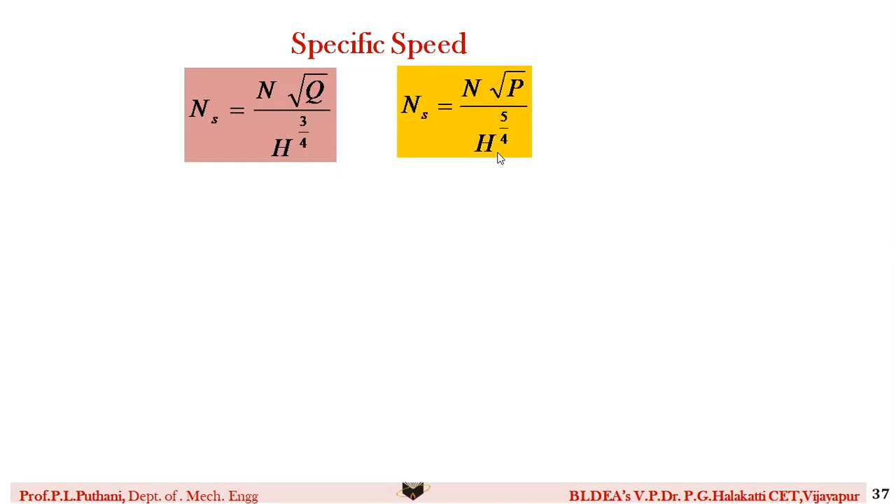Similarly, for unit quantities, if it is unit flow, we write it as Qu is equal to Q divided by root of H. Whereas another term known as unit speed, Nu is equal to N divided by square root of H. Similarly, unit power is given as Pu is equal to P divided by H to the power of 3 by 2. So many times in the examination, we have some confusion.

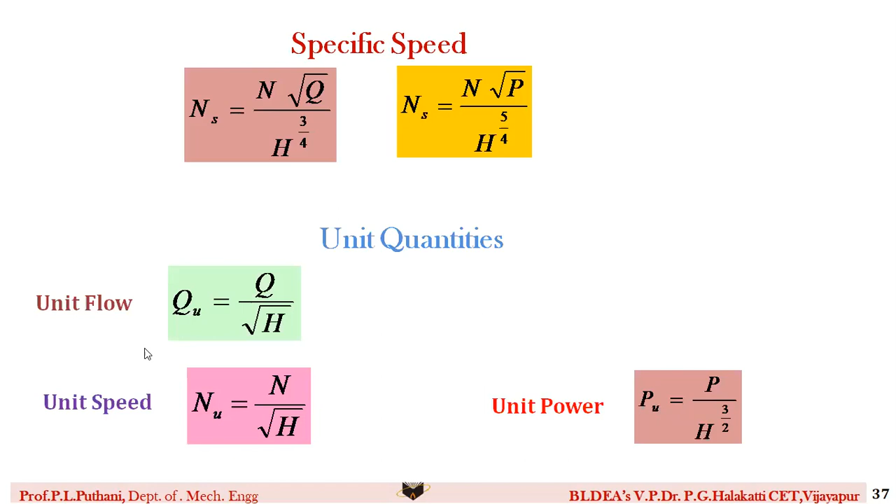Please do remember these simple equations very easily, avoid confusions. Only thing is, when we are writing specific speed of a pump, the parameter here is Q and the H value power is 3 by 4.

When you are writing with respect to turbine, we are having parameter as power P and the power of H as H raised to 5 by 4. The same here also, for both unit flow and unit speed, we are having square root of H itself. But if you come for unit power, the value is H to the power of 3 by 2. Please do remember these differences, such that you won't commit any mistakes when solving the problems.

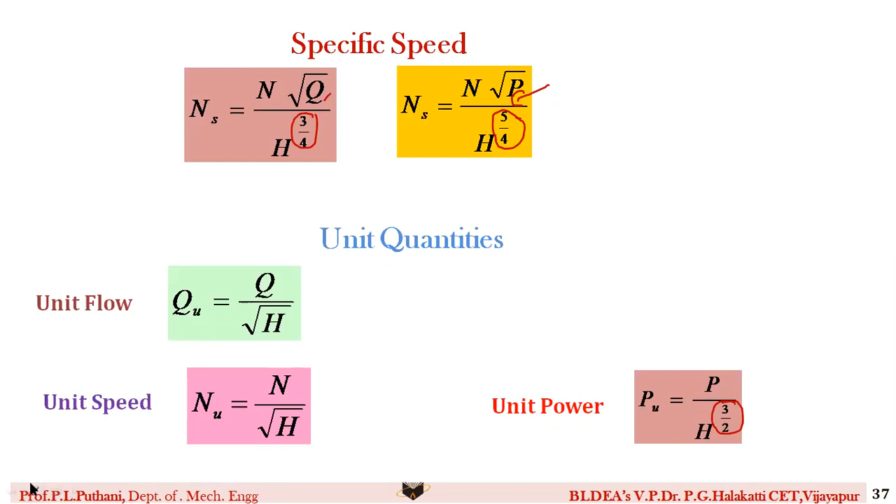Let us move further regarding the discussion of the questions asked in the previous question papers. The first question: there are 4 turbines of specific speed 890 metric, each installed in a hydel station. Each turbine runs at 50 RPM, sharing equally a total discharge of 260 meter cubes per second, available under a head of 1.73 meters. Assume each turbine has an efficiency of 82.5%. Find the power of each turbine in kilowatt. This is the question given to you.

So if you extract the given values from this problem: the first thing is how many turbines - we have 4 number of turbines, so N is equal to 4. Next, specific speed 890 metric - Ns is equal to 890, and it is in terms of metric.

So metric means MKS system. You need to convert this back to the SI system. So we have one conversion factor - if you use that conversion factor, you can convert from metric to SI of the specific speed.

Next he has said that these turbines, each turbine is running at a speed of how much? 50 rpm, which means that is n, capital N speed. All together they share a total discharge of how much? 260 meter cubes per second.

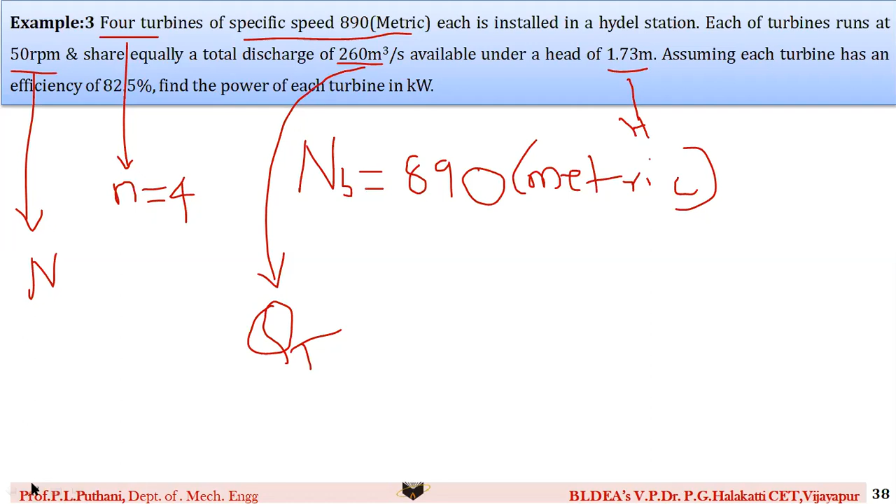Assuming each turbine has an overall efficiency of how much? 82.5%. You need to find what? Power of each turbine. These are the things you need to find out when you are solving the problem.

So now let us go step by step. The given data: as I said, the number of turbines is 4. Head available is 1.73. Specific speed in metric is 890 metric. Efficiency 82.5%. Then your speed is 50 rpm and the discharge is 260 meter cube per second. So you can note this as this particular thing.

I told you the important thing is if it is given in metric, you need to convert it into SI system. So for conversion to SI system, this conversion factor is needed for specific speed. That is, if you multiply the specific speed of metric with the conversion factor 0.857, then you get the value of specific speed in SI units.

So in SI units, let us see what value we get. We get it as 762.73, and this is a dimensionless case. Specific speed is a dimensionless number. It is just a number. Then for turbines, you know the specific speed equation.

If you are using, we write it as ns is equal to n root P divided by H to the power of 5 by 4. Speed is already given in the question, that is 50 rpm. Specific speed we have just now calculated. Even head is given. So what we can find out?

We can find the power P. So the power P, if we substitute all these terms, we get it as how much? 916.030 kilowatts.

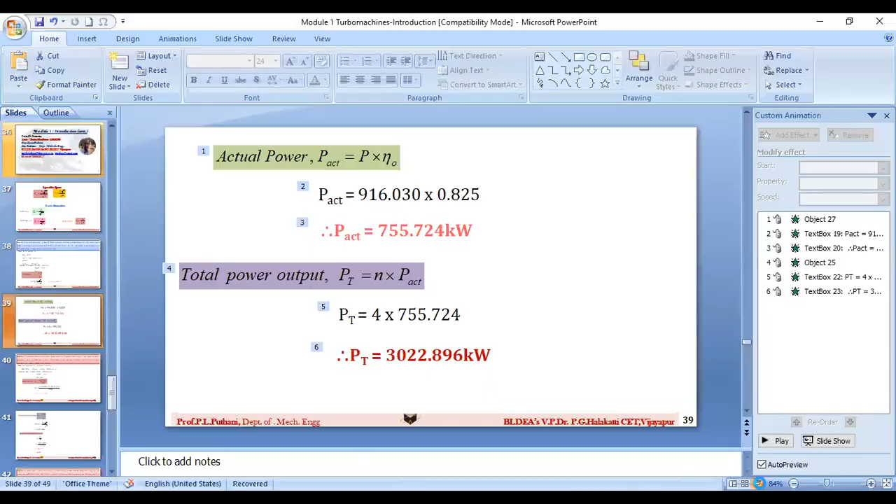So now actual power, yes, I was telling you, it is P actual is equal to P into efficiency not, or what you can do is you can have this. As I was telling you, the efficiency, you can term it as efficiency not, as I have taken it as the overall efficiency, no problem. You can keep it or you can leave it also.

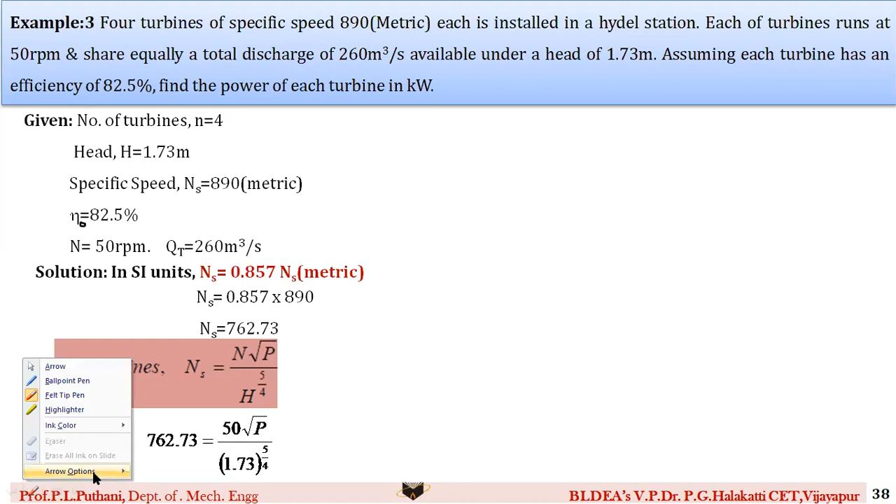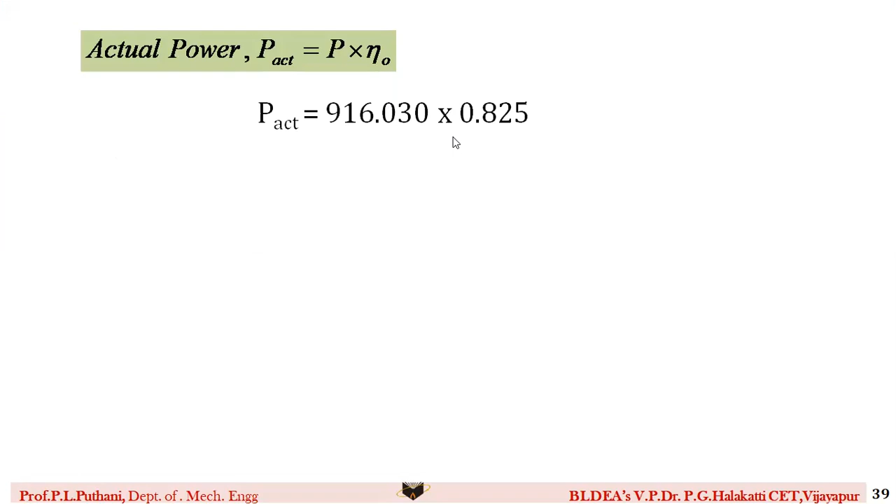So what do we get? Actual power is equal to the power what we have got. It is having some, the turbines are 82.5% only efficient. So we need to consider that efficiency factor also. So once you consider the efficiency factor, we get it as this value: 755.724 kilowatt. This is for one turbine.

This is for one turbine. If you are having 4 turbines, multiplying it by 4. So the resulting, how much we get? The total power output, we get it as 3022.896 kilowatt. This is the answer for this particular problem.

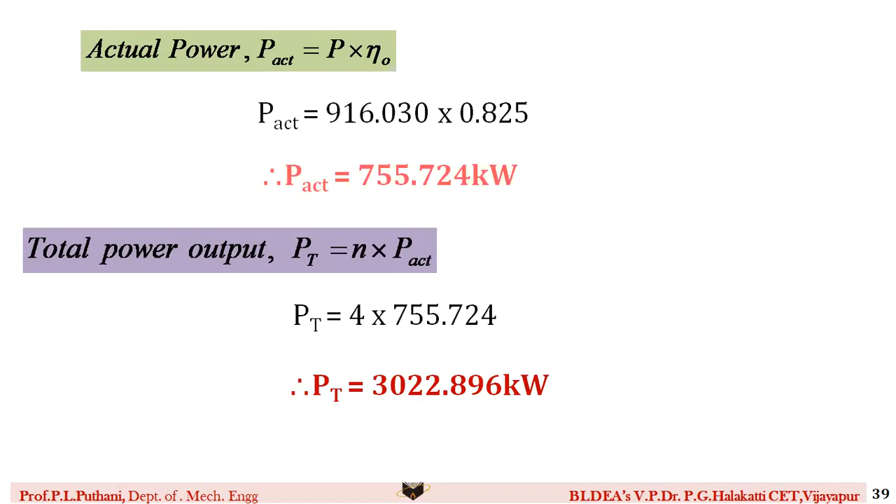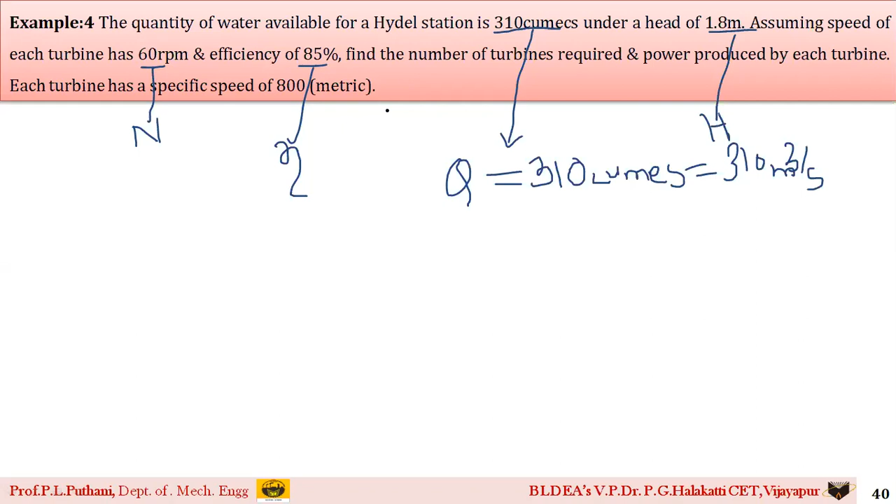We need to find out how many number of turbines are required to operate this hydel power station, along with the total power as well as the power required by each turbine.

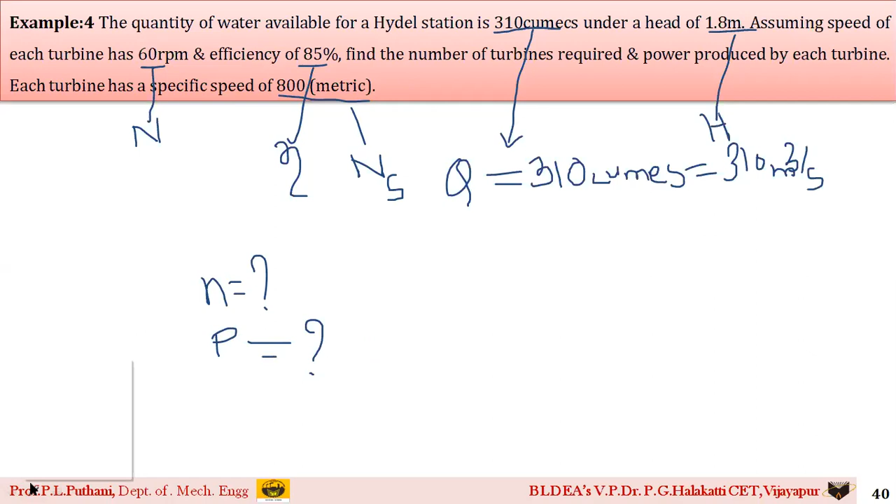He has given another term, specific speed NS, but it is given in metric units. We need to convert it into SI using the conversion factor discussed in the previous problem. Let us see the things one by one.

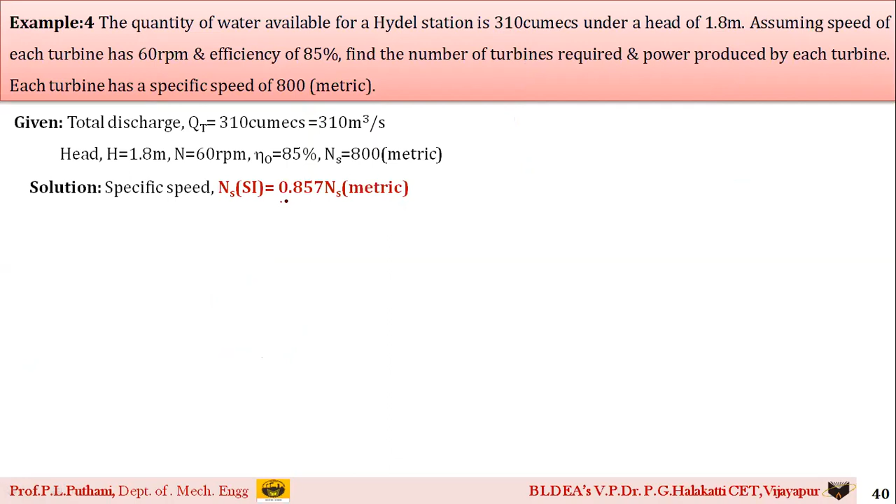This is the given data which we have written here. For converting the specific speed NS, the conversion factor used is 0.857. If you multiply this conversion factor with the NS specific speed in metric value, you get the resulting value in SI units. So the value of specific speed in SI is...

685.6. Now we need to calculate the total power first. The total power is calculated using this equation: P is equal to rho g Q H eta naught divided by 1000.

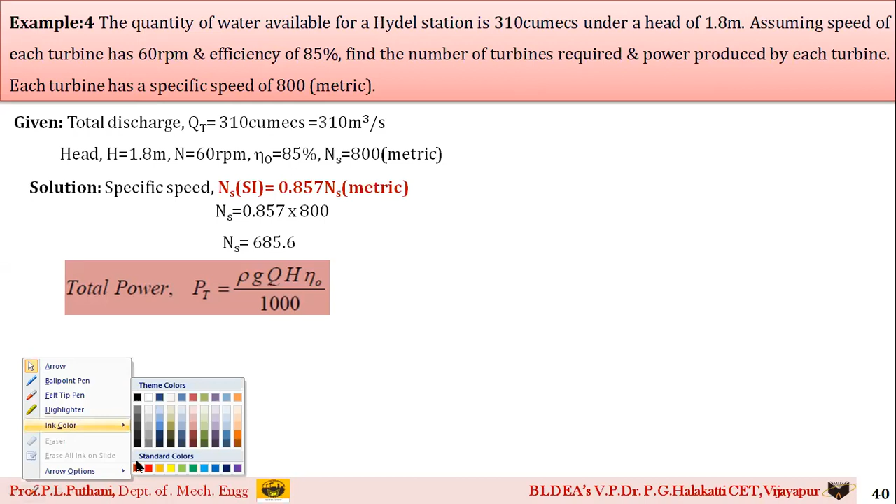The power which we are going to calculate is in terms of kilowatt. That is the reason we divide this equation by 1000.

Density rho, since the fluid is water itself, the standard value of density of water is 1000. You know the value of G is 9.81. Q is already given in the question, that is the value of Qt, which you can take here also. It is 310 meter cube per second. H is also given to us.

Eta naught is given, so you can calculate the total power of the plant, which is missing. We need to calculate total power of a power plant. Let's see what we get. Once you substitute the values, the total power you get is 4652.883 kilowatt. This is for the total entire power plant.

The question asks us to calculate the power for each turbine and how many turbines are required. Let us go for calculation of power required for each turbine, which we can calculate with the help of the specific speed equation also.

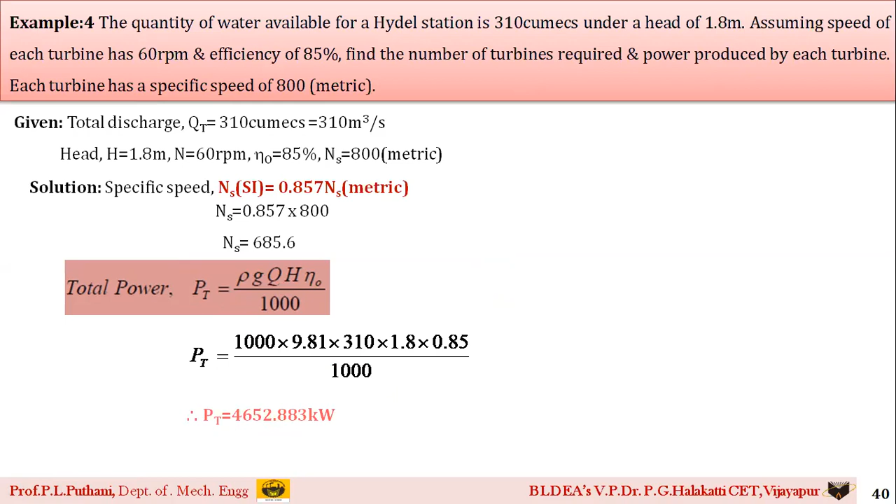The specific speed equation: NS is equal to N root P divided by H to the power of 5 by 4. Specific speed we have just calculated in SI units. N is already given in the question. H is also given in the question. Whatever value of P we get, this power is for each single turbine. Total power for the entire power plant we calculated using all the turbines together.

Now once we substitute all these values, we get the value of power for each turbine. It is 567.57 kilowatt. Now using the total power of the hydel power plant as well as the power of each turbine, we can find how many turbines are required to generate the power.

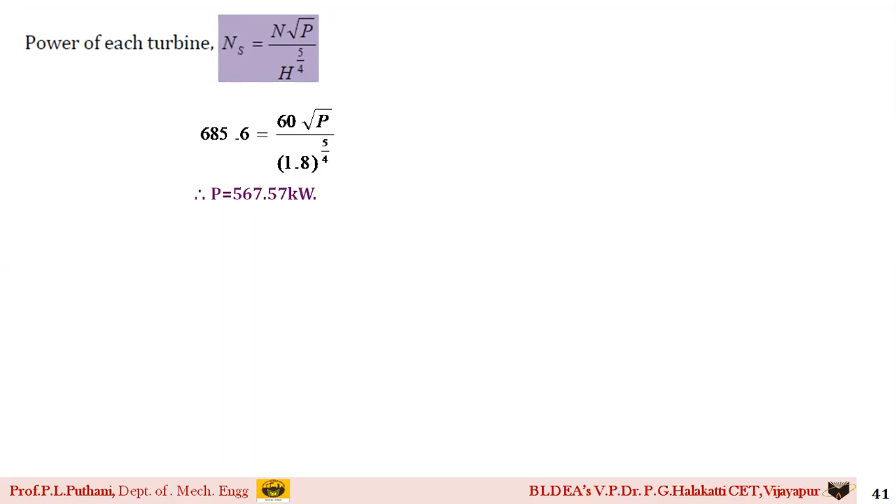Number of turbines is equal to: PT is equal to N into P. If we substitute, we get the value as N is equal to 8.19. We need to round this off, so approximately around 9 turbines are required to generate the power from the hydel power plant.

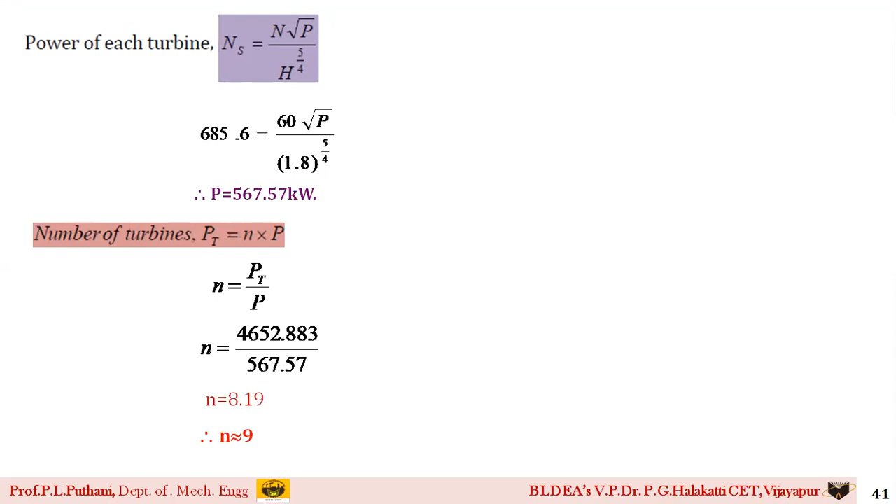This is regarding this particular problem. Similarly, another problem.

In this problem, he has told that there is one Pelton wheel running at a speed of 200 RPM, and it develops 5200 kilowatt with a head of 220 meters, having an overall efficiency of 80%. Determine its unit speed, unit flow, unit power, and specific speed. Then find the speed, flow, and power when its operating point changes to a head of 140 meter. Take density of water as 1000 kg per meter cube.

If you read this problem carefully, it has two parts. The first part starts here: Pelton wheel running at a speed of 200 RPM, developing 5200 kilowatt power, with head of 220 meters and overall efficiency of 80%. With these conditions, we need to find the unit speed, which is n suffix u.

Unit flow, that is qu. Unit power, pu. Specific speed, ns. This is the first part of the problem. Up till here, this is the first part of the problem.

Second part of the problem is, if you read the question carefully, again we need to find speed n, flow q, power p, when its operating point changes to a new value of h.

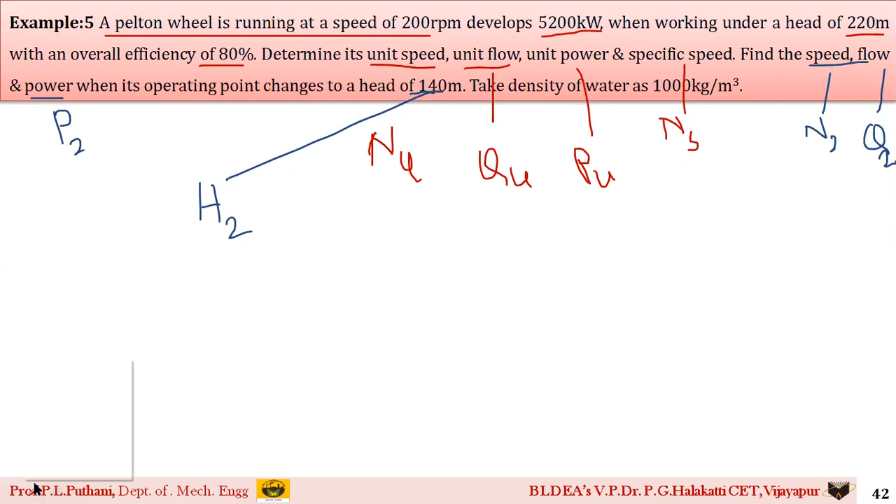So we need to solve each case one by one separately, such that we can get the required results. Let us proceed. First, note down the given things.

For the given things, for the first case, he has said 200 rpm is there, speed, power developed is 5200 kilowatt, head developed is 220 meters, efficiency of 80%, and apart from that, the density of water is 1000 kg per meter cube.

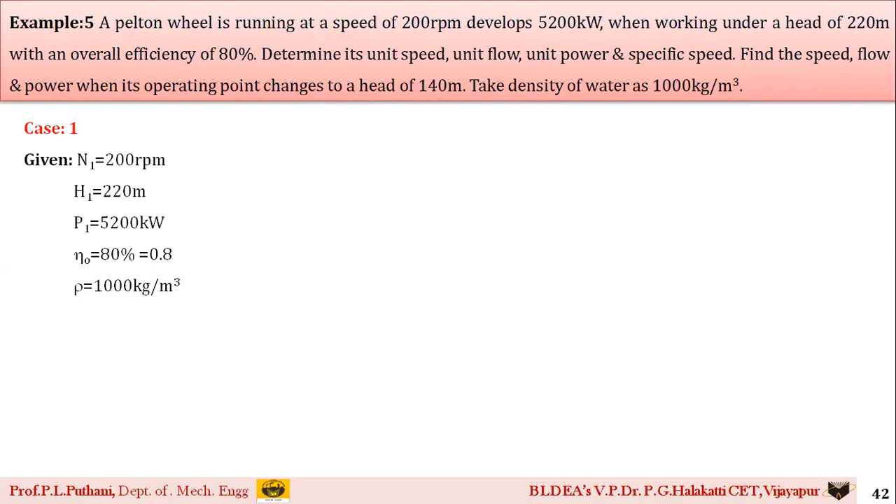Let us find the unit speed. Unit speed equation we know, nu is equal to n1 by root of h1. Already we have discussed this equation, and also we have glanced today before beginning of this particular session, that is nu is equal to n1 by square root of h1.

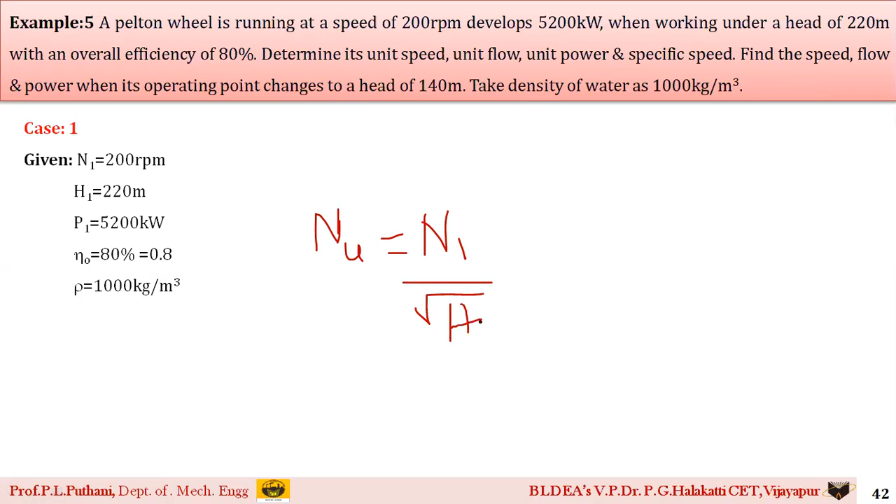n1 is available here, h1 is available here. We can find out unit speed. Similarly, you can find even unit flow, unit power, as well as specific speed. Let us proceed one by one.

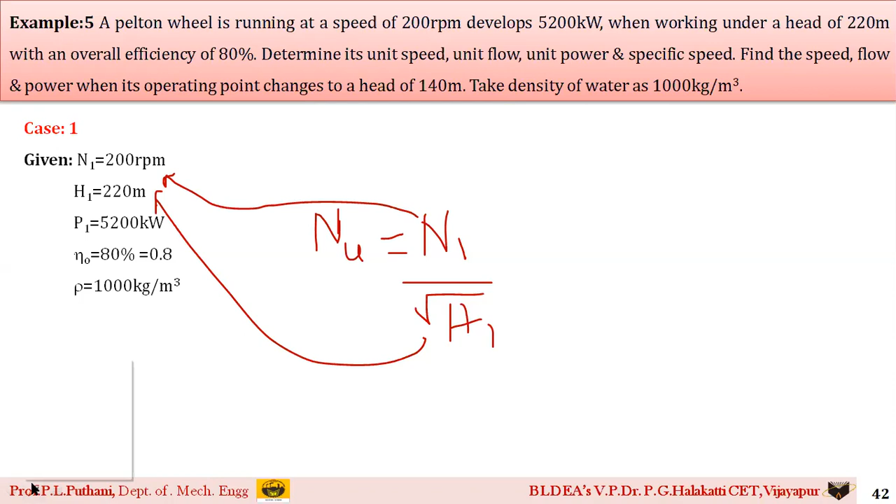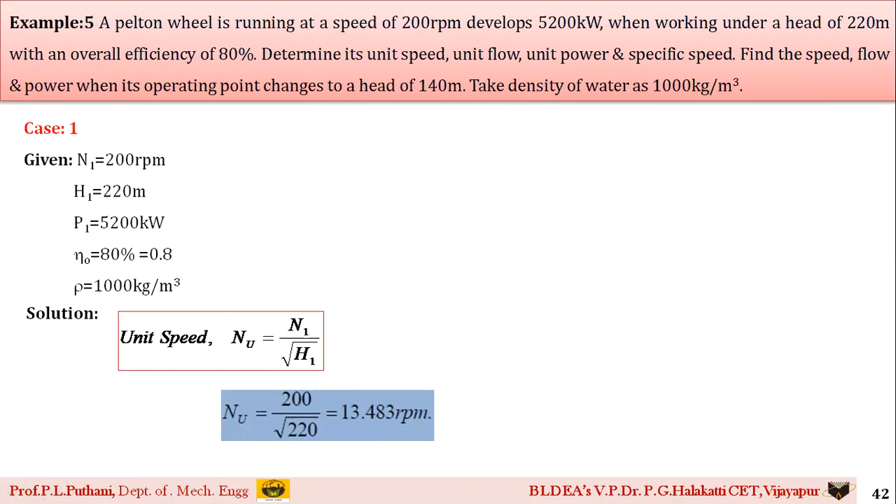So for the solution, unit speed is given by nu is equal to n1 by square root of h1. If you substitute the values here, we get the unit speed as 13.483 rpm. Similarly, for unit flow, qu is equal to q1 by square root of h1.

But the thing here is, we don't know q1. We need to find q1 using our power equation. Power equation, p1 is equal to rho g q1 h1 efficiency naught divided by 1000. Power p1 is given, rho g we know, q1 we need to estimate, h1 is also given for case 1, efficiency is also given. So this is the missing term.

We need to find q1. So to find q1, we use this power equation. Once you substitute the values, we get the value of q from this equation, that is q1 is equal to, substitute the values, the value of q1 we get it as 3.0117 meter cube per second.

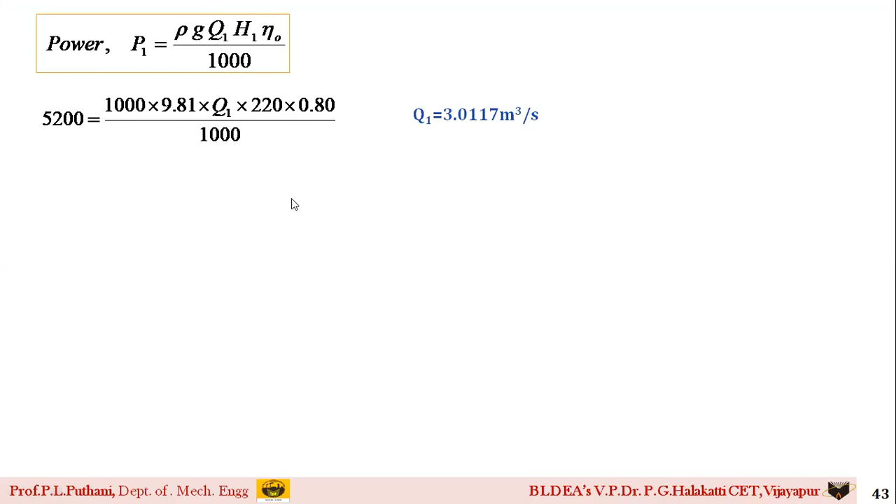Now the unit flow qu is equal to q1 by square root of h1. Substitute the values, you will get the value of unit flow as 0.20305 meter cube per second.

Another term which we are left with is the specific speed. Now as we are having both discharge and power, you can use any of the terms. Already you know when we are calculating the specific speed, we are having two types of equations. We can go with the best equation, Ns is equal to N root of P1 divided by H1 to the power of 5 by 4. Use this particular equation to get the value of Ns. Let us see how much value we get now.

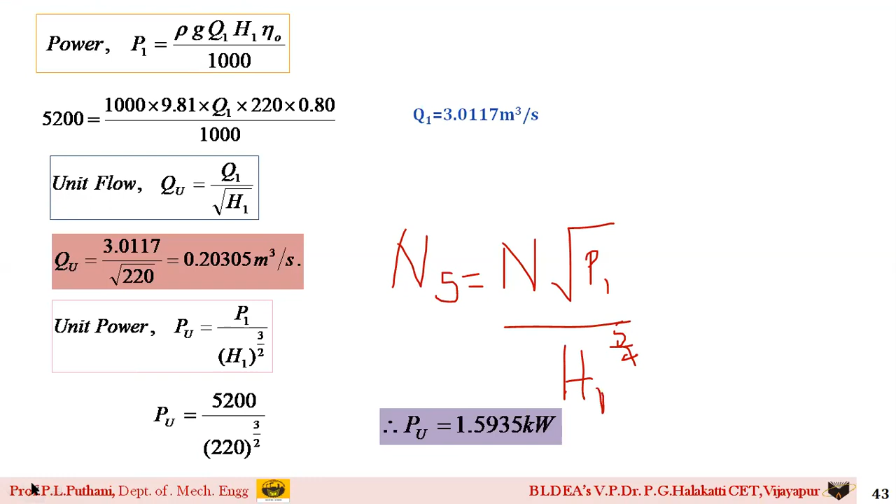Ns equals N1 root of P1 divided by H1 to the power of 5 by 4. The specific speed value we get as 17.021. This is regarding case 1.

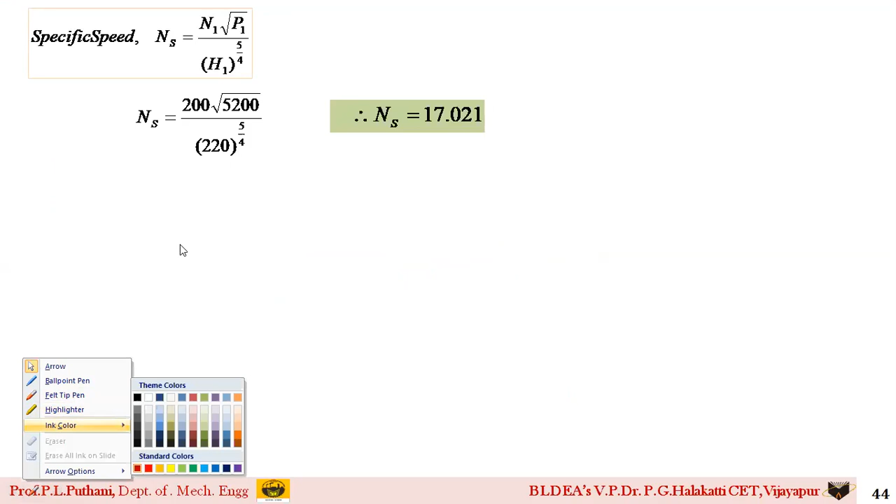In case 2, the head position has been shifted. Initially in the first case, H1 value was 220. Now for the second case, this value has been decreased to around 140 meters. So for this height of 140 meters, we need to find N2, Q2, P2, and other things. Let us see how we can get the solution for this second case.

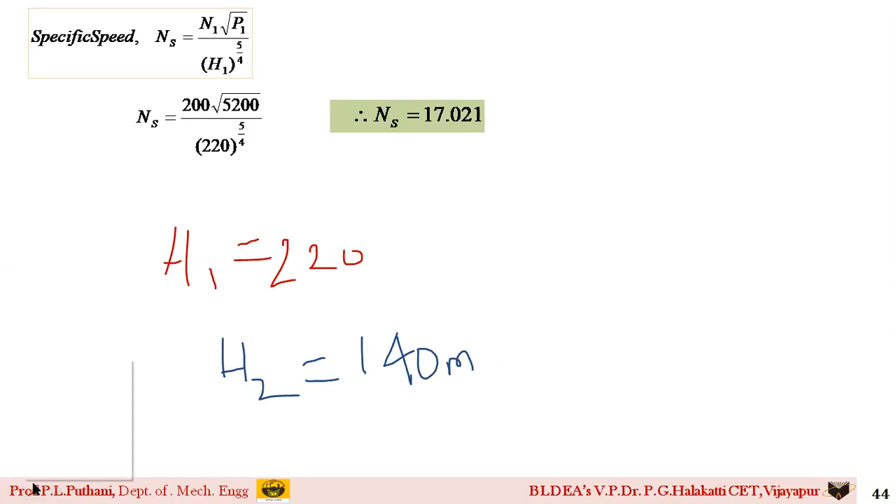In case 2, along with the conditions written for the first case, only the head value is given. Using this, we need to find N2, Q2, and P2.

In the discussion of unit quantities, whether it is with respect to Q, speed, or power, there is one term to keep in mind: all unit quantities are geometrically similar. This is the word I used in each of the definitions.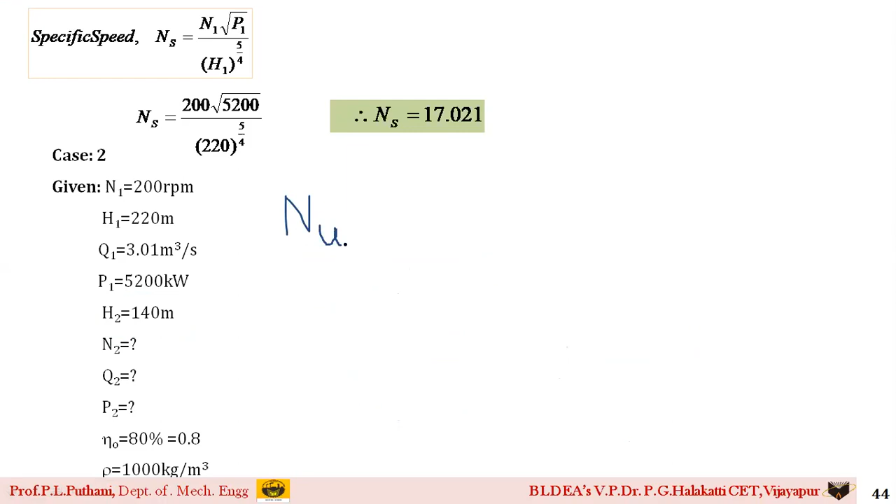Since they are geometrically similar, unit flow QU for the first turbine is Q1 by square root of H1, and it should equal Q2 by square root of H2. The same applies for unit speed: Nu is equal to N1 by square root of H1, which equals N2 divided by square root of H2, because they are geometrically similar.

N1 is already given in the question, H1 is also given, H2 is also known. Only the missing term is N2. So we simplify it as N2 equals N1 by root H1 into root of H2. You will get the value of N2, and similarly for Q2.

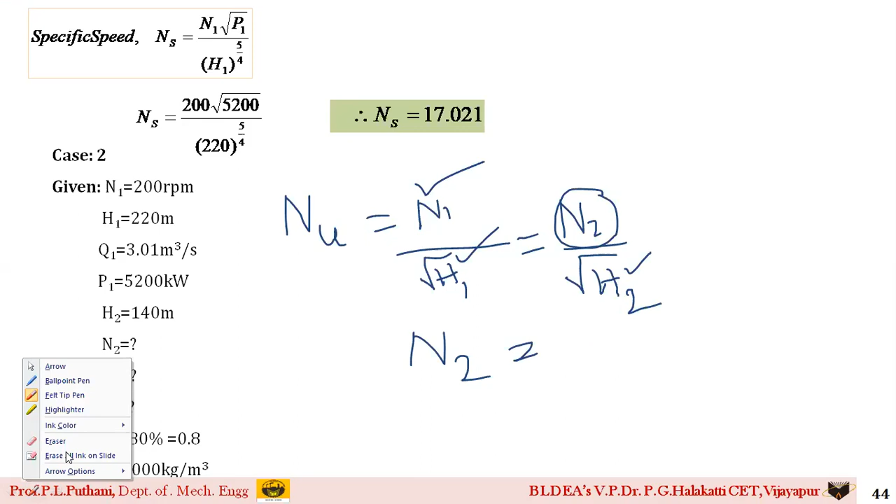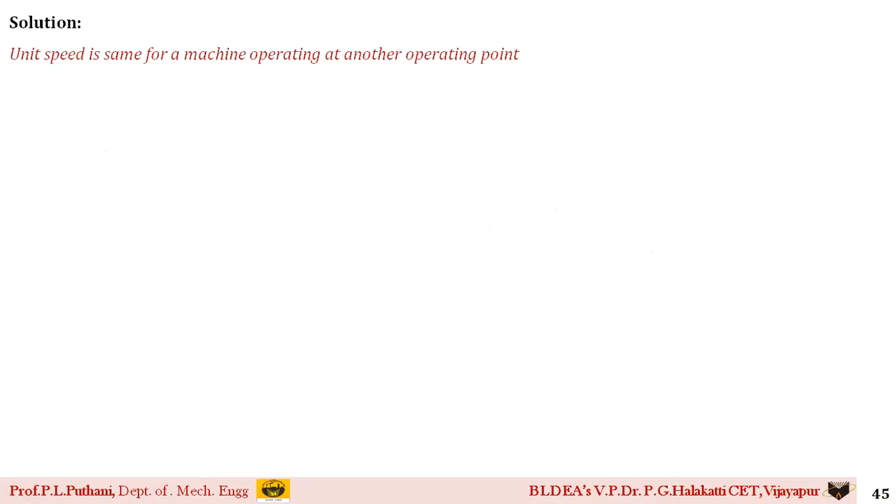Let's see how we get these values. Initially, unit speed is the same for a machine operating at another operating point also. That is, Nu equals unit speed, Nu equals N1 by root of H1 equals N2 by root of H2. We already know these values, only N2 is missing. Substituting the values, we get N2 as 159.54 RPM.

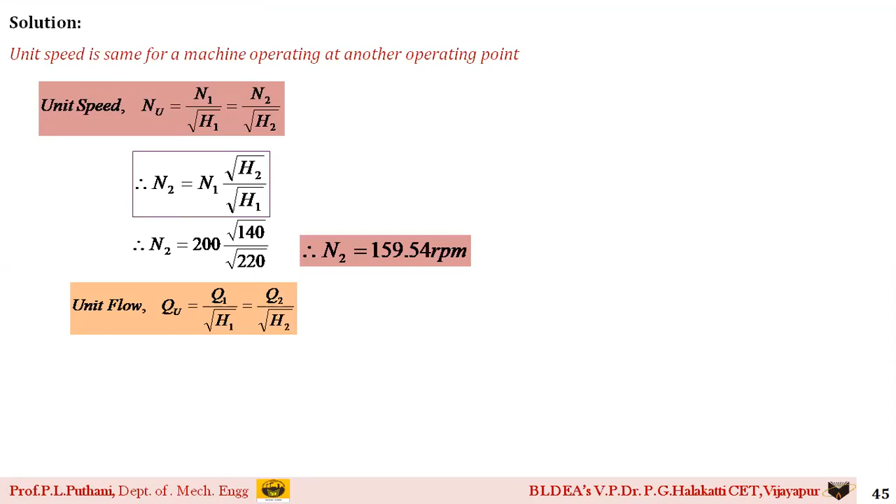The same we do for unit flow. Unit flow QU equals Q1 by square root of H1 equals Q2 by square root of H2. On substitution, we get the value of Q2 as 2.4011 meter cube per second.

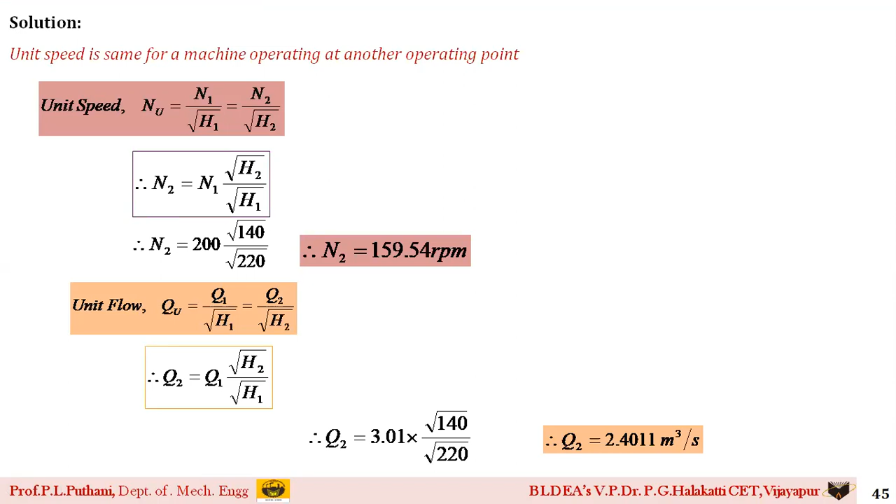Similarly, for unit power, PU equals P1 upon H1 to the power of 3 by 2, equals P2 by H2 to the power of 3 by 2. So what is the unknown term? We have P1, we have H1, we have H2. The unknown term is P2, which we can now estimate.

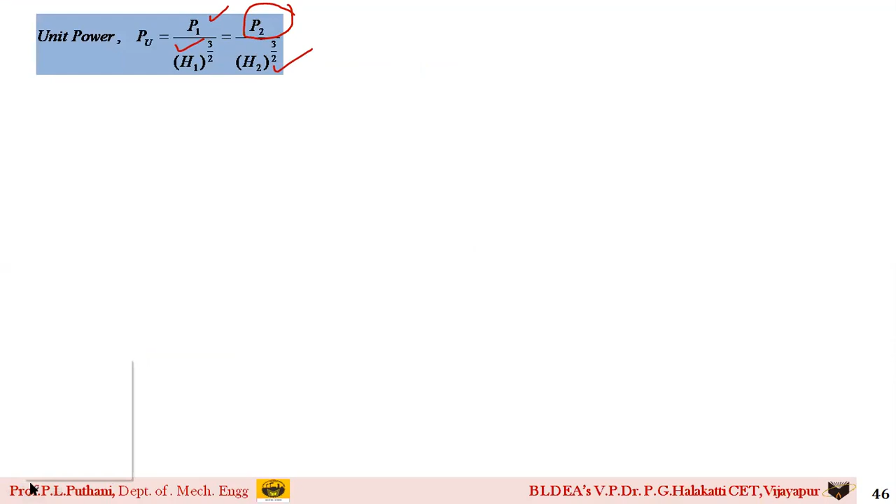Therefore, P2 is equal to P1 into H2 by H1 whole raised to 3 by 2. On substituting the values, we get P2 as 2639.74 kilowatt.

So this is the power. Then similarly, if we check the value of specific speed here, Ns equals N2 root of P2 by H2 to the power of 5 by 4. Substituting the values, you get the same value as the first case, since it's a dimensionless number. So Ns on substitution gives 17.021 itself.

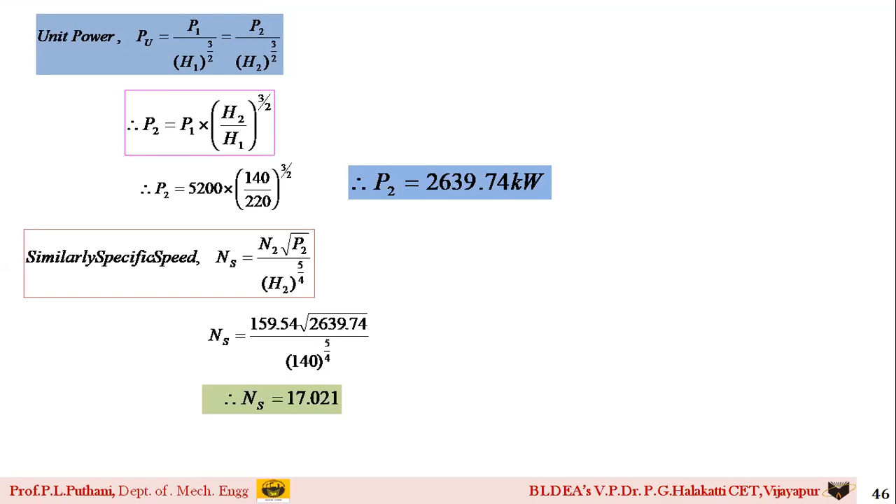So these are some of the problems related to specific speed as well as unit quantities. These are some of the questions asked in previous question papers. Similar kinds of questions you can solve from any textbooks or previous question papers.